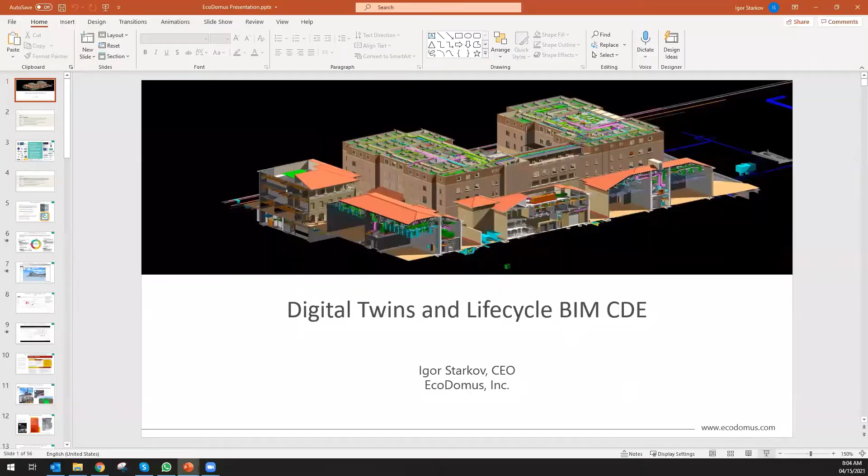All right, so first about EcoDomus. EcoDomus is a California company. I'm one of the two co-founders, and we have been around for about 11 years. We were the first company that started using BIM for something besides the clash detection that everybody used it for the first 10, 15 years.

So it happened, I was graduating from my previous company, Latista, which is now part of Oracle, which was the first company to do the tablet PC-based construction management. That was 2008, 2009. COBie was just introduced. COBie, for those who don't know, stands for Construction Operations Building Information Exchange. And I decided to build a software for COBie.

And then my co-founder, Mitch Borislavsky, who is based now in Warsaw, in Poland, he said, why don't we, Igor, start offering these solutions to the owners, the COBie for the owners. So we said, it's a great idea. And so we started doing the intelligent model for the first client. It was University of Southern California.

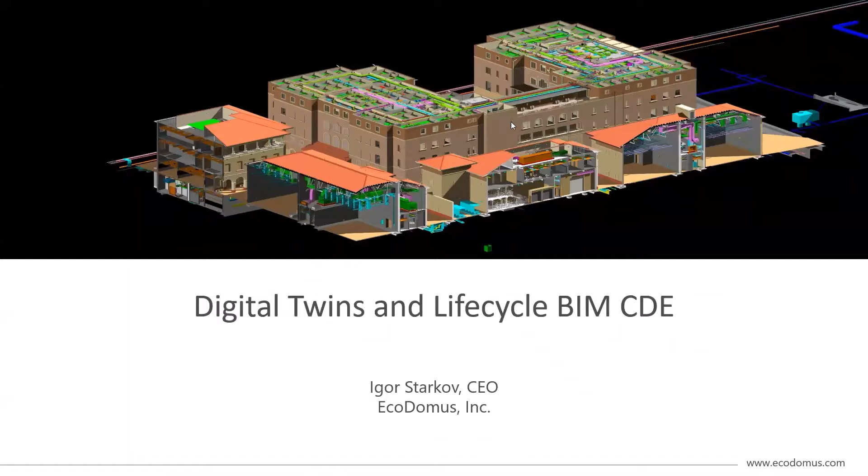So the building you see in front of you, it's a School of Cinematic Arts funded by Steven Spielberg and George Lucas, and they wanted the university to use 3D BIM. So the university asked for BIM from their contractors. That was 2006, 2008. They got the beautiful Navisworks model, but it was useless because nothing about this model was intelligent in terms of the data. And so we started helping them by collecting the information for this model in our application. And so that's how EcoDomus was born.

Since then, we've been working with the world's greatest facility owners, clients, and their builders, architects, engineers, facility management consultants, and IoT consultants. So, for example, EcoDomus is the BIM common data environment for the US government, for the GSA. GSA stands for General Services Administration. So about 9,000 buildings for the GSA are being stored in EcoDomus CDE. I'll show you today a few other nice examples like Sydney Opera House and maybe Google and some others.

So the idea was to build this software that would process the data associated with BIM elements and allow people to access the BIM models through the web interface and kind of democratize BIM a little bit. So that's what EcoDomus is.

So now let's move towards the definition of what digital twins are and why is it critical? There's a lot of conversations going on right now about digital twins. Some people just laser scan the facility and say, hey, we just built a digital twin of that facility. Our definition is slightly more complex.

First of all, from the technical point of view, digital twin is a combination of all available technologies related to a facility. So it's BIM plus sensors plus CMMS, CAFM plus ERP plus GIS plus DCIM plus whatever, right? Because if you miss out on at least one of the technologies, they may say, well, why are we not also a digital twin, right?

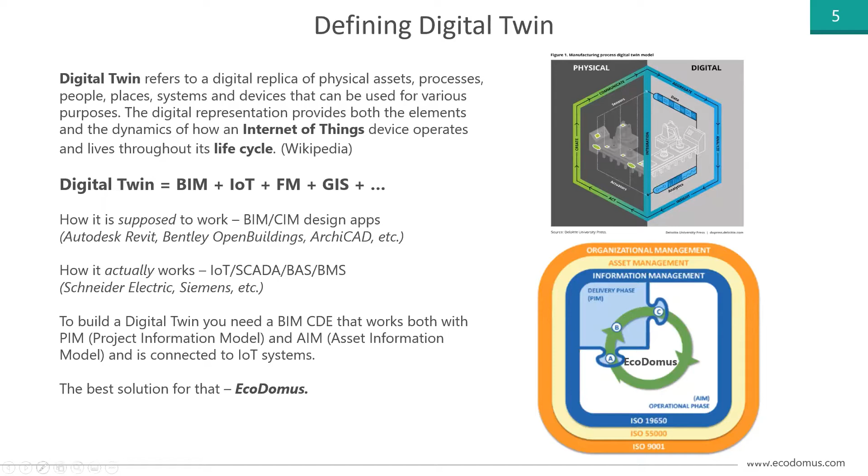Our solution, why I put it in the middle here, is a life cycle common data environment. You've definitely heard of many other CDEs like BIM 360 Docs, ProjectWise from Bentley, Aconex from Oracle, and British solutions. They primarily focus on PIM, on the project information model. We are supporting both PIM and AIM. And let's now dig deeper into what I mean by that, right?

So common data environment is during the design and construction stage. Some of the things BIM 360 Docs does better than we do, right? So for a small design firm, if you just need to store Revit files in the cloud and open them up and just publish the files back to the file storage, you can be okay with BIM 360 Docs. Some things it does even better than we do.

On the other hand, if you want to manage the metadata for the elements of the model, we do that better than BIM 360 Docs, because our capabilities with asset information management are more advanced. And we do it all in one platform, while in BIM 360, you need to have separate applications for Docs, separate for Field, separate for Ops, separate for Assemble, because Autodesk was buying them over the period of several years, right?

So it's not easy to take an application and merge it with another application, completely creating a single platform. It's impossible. But you can integrate them to some degree, but it's still going to be separate applications. EcoDomus is a single platform, so we have one single database where we store that information.

So during the design stage, our goal is really to check the model data for compliance. So we have a QC engine that helps us to establish the set of requirements for the metadata for the elements and make sure that this information is useful for the handover to construction. During the construction phase, we validate information that builders are entering in the field or back in the office and making sure that it's well prepared for the handover to operation and maintenance.

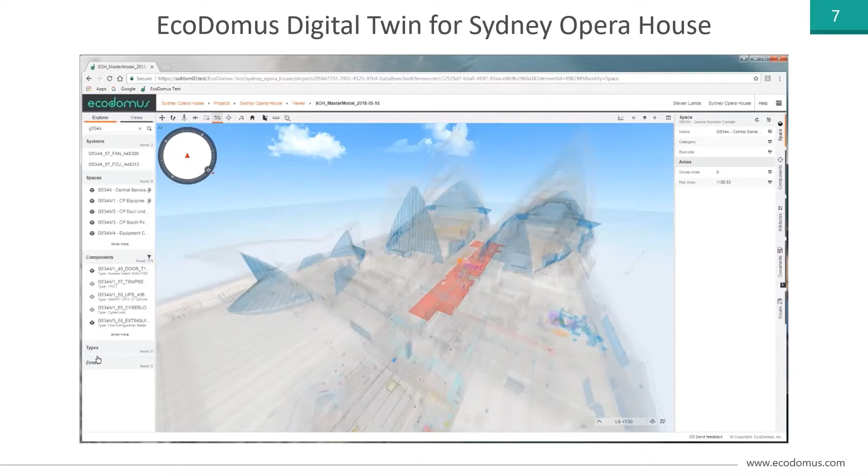The other thing is also the Autodesk API for Forge. It's limited. Autodesk doesn't open up some of the API calls because they're afraid of the competition. For example, there is no native Forge app for the iPad and Android. You can only use the browser version. And we use native apps from the App Store and Google Play when we deal with native mobile applications. Anyway, so we decided to build our own viewer.

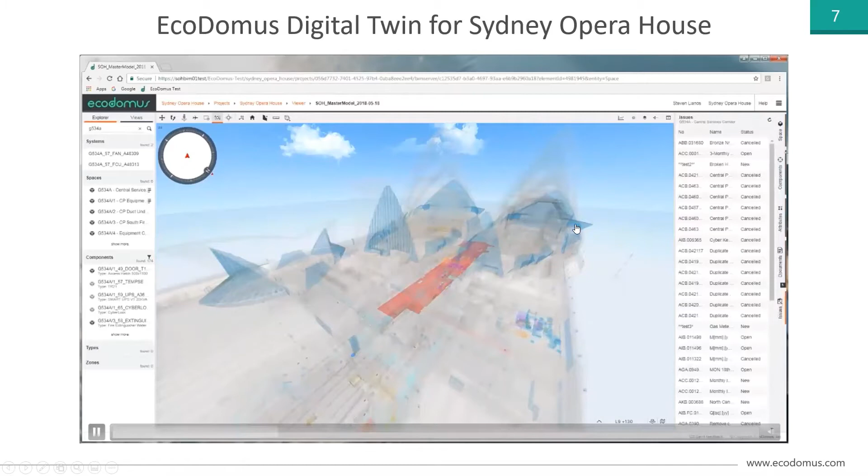So I found this location. I see it through the walls because it's an underground location. On the right side, I see all of my objects inside of that space, 1,200 of them. I see the attributes extracted from the model for this space. I see the documents associated with that location, that space. I see all of my construction and operational issues or work orders associated with that location.

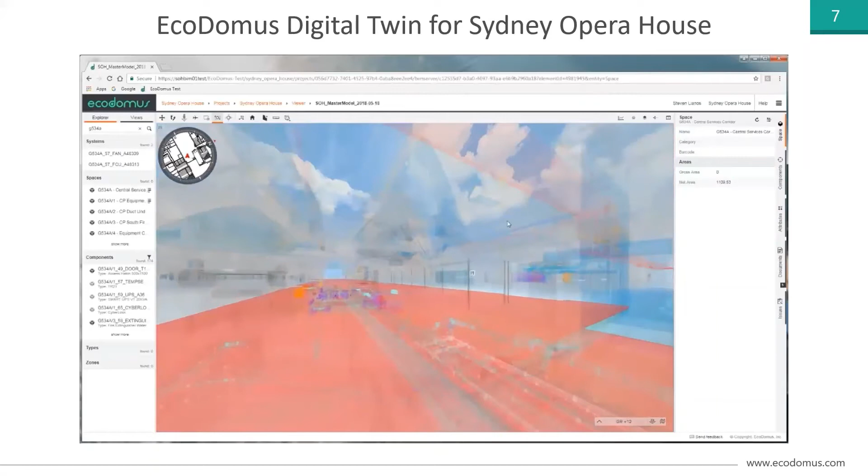I can see how many people are right now in that location, what's the air quality, what's the temperature within this location. So pretty much any question I want to know about this room, I have in my database. Now I remove the transparency because I want to see the objects as they are. And here's the lighting fixture that I'm interested in. Now I see the information about this component.

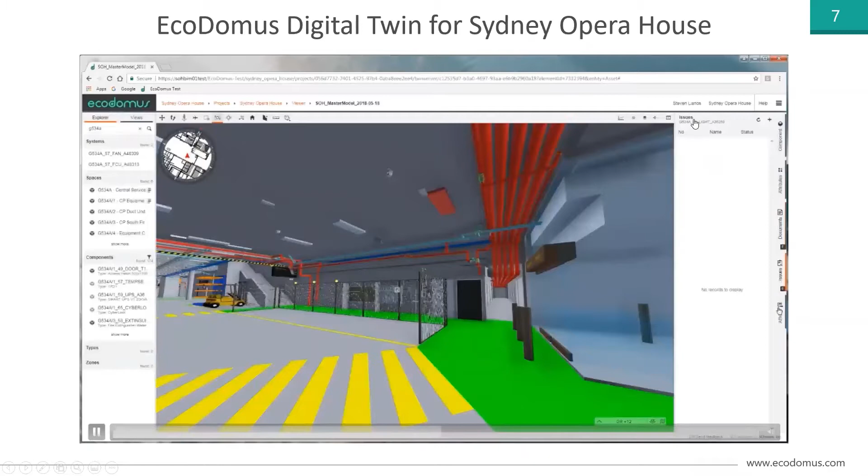And not only can I see it, like in many other viewers, I can edit those parameters. I cannot move the geometry of this lighting fixture, but I can edit its parameters. And I can open up the documents associated with this lighting fixture. I can see the original electrical schema from the 1960s. I see that there are no open issues, so I can create an open work order for this lighting fixture, specify that something is wrong with it or whatever.

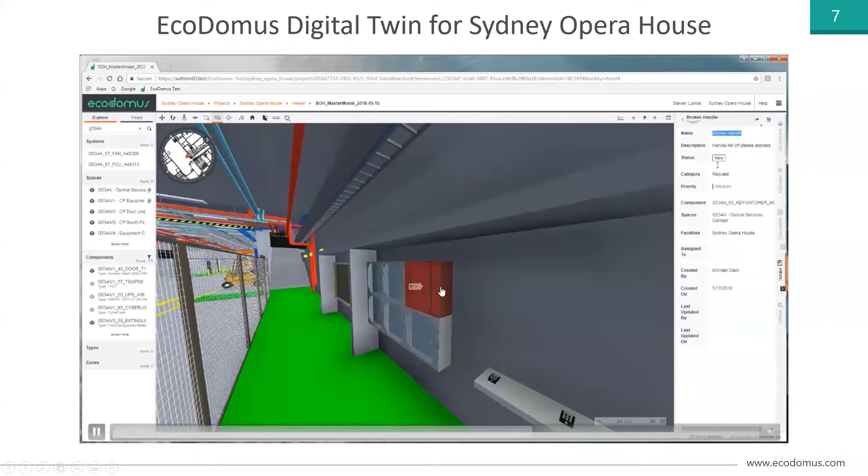While I was looking at this lighting fixture, I noticed that there's an open tag applied to one of those boxes. So I see, all right, so this is the box. What is happening here? I see it's the key holder box, and there's a broken handle for this box, so I can assign somebody to go and fix it if needed.

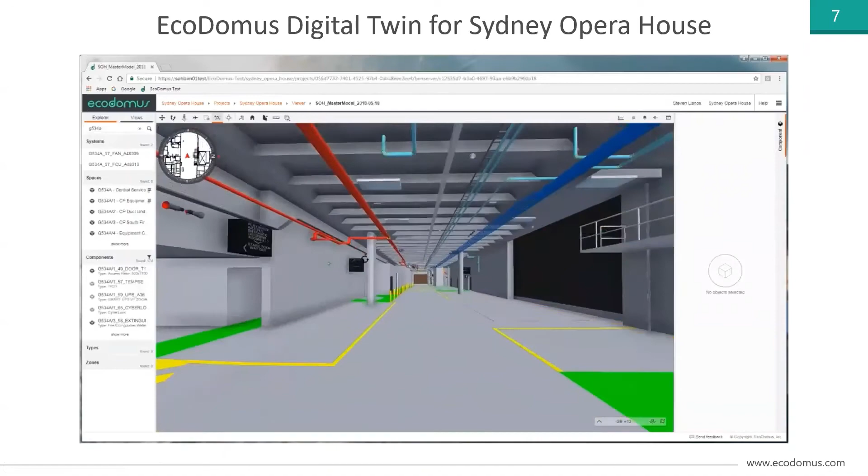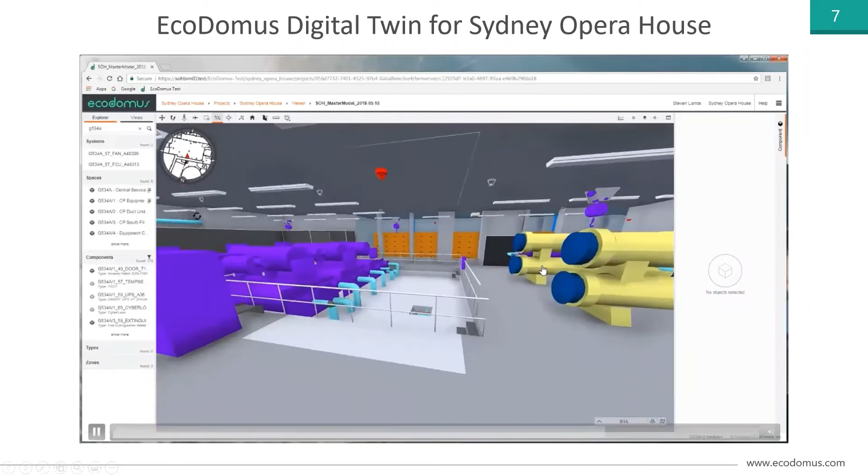As you understand, since I'm dealing in BIM, it may be an existing facility, or it may be a facility that hasn't even been built. You can simulate the work as if you actually already built this facility and do all of these trainings and planning while the building hasn't even been built yet, right? Because we operate in a virtual world here. So I can look at its chiller room, I can go back, and I can actually switch to 2D navigation if I want to, because 2D and 3D, we have them interconnected.

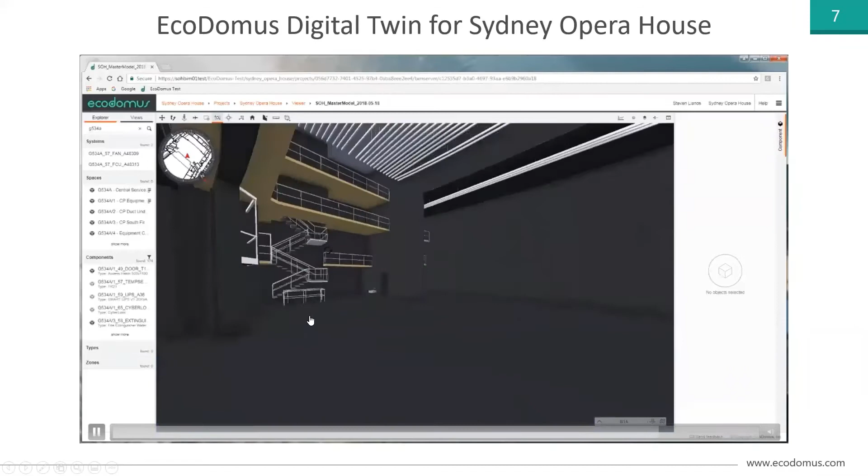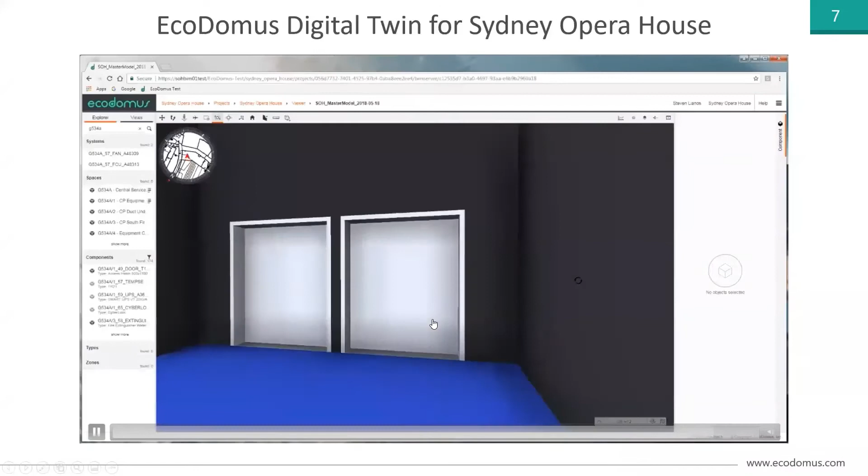So now I'm going into the central performance hall. I've noticed that my chairs layer is turned off because it's the federated model. So I can go back, you see all of these files, they are BIM files here. So I turned on my furniture level, and I can select an individual chair and say somebody spilled coffee on that chair. Right. So that's how kind of a basic navigation within the software works.

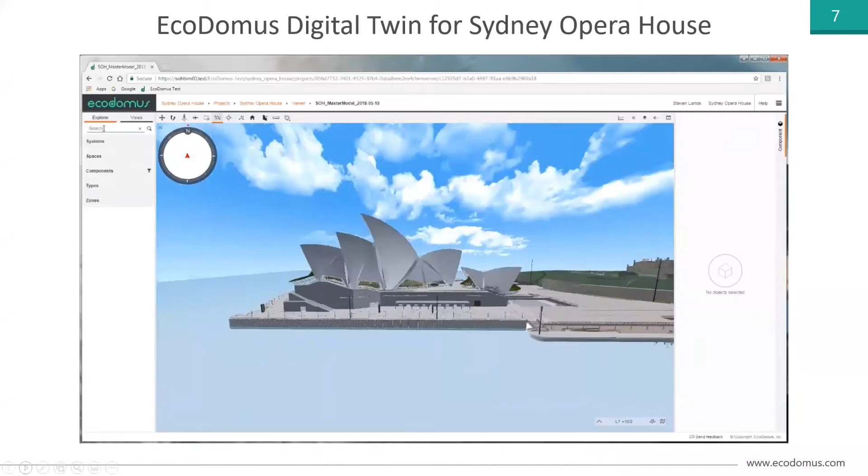All of these elements are objects. Every object has the database connection, and you can do something within it. Like I mentioned earlier, 2D is also an interface that we actively support, because a lot of tasks look better when they are navigated within 2D, like for example, electrical schemas, but we still make them interactive.

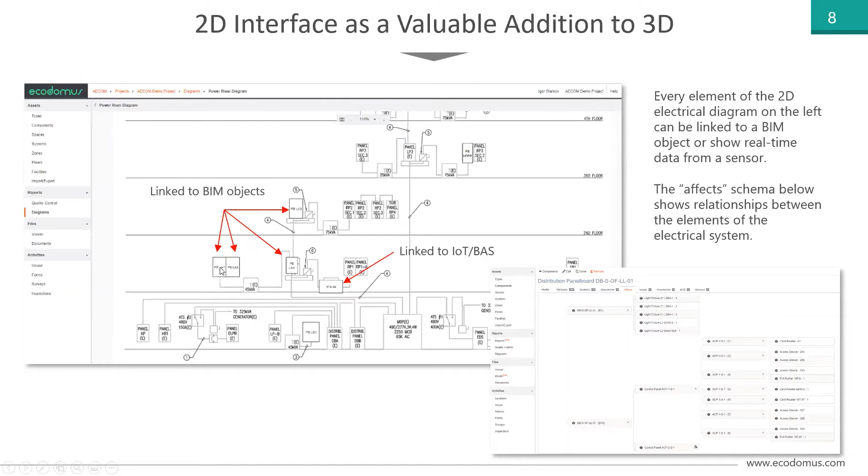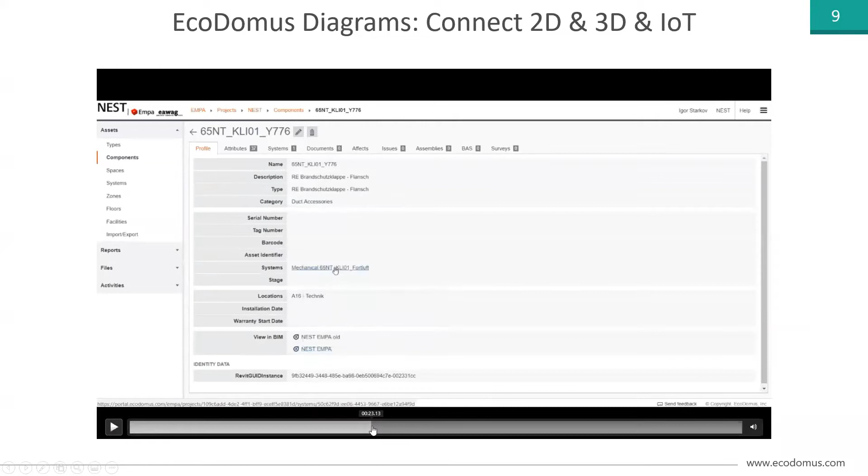So when you click on this rectangle with panel board LA1, it will open for you the profile page for that asset, and like in this example, when I navigate here, this is the building in Switzerland. So I can see my real-time data, but at the same time, I can see my properties for the assets. I can see the documents, BAS data, et cetera. And if I want to see that in 3D, it loads my 3D viewer and finds that asset within the 3D viewer. Showed me where it is.

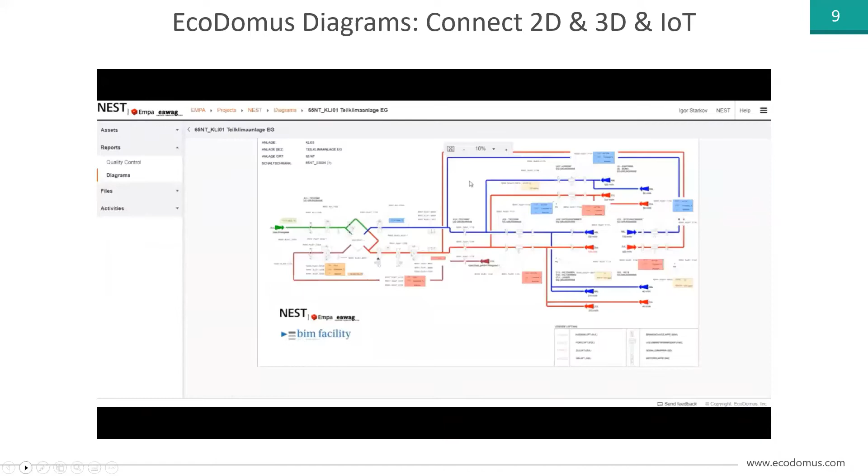Why do people do that, right? There is no such thing as a generic digital twin. All of them are used for a specific purpose. So for one client, a digital twin may include only architectural elements, because that's what they built it for. We had a client that wanted to train their first responders, the firefighters, police, and for them, piping and ducting was not needed. So it was much easier just to create the basic architectural and just navigate within there.

For other clients, like we're doing a big project for Harvard University, they said, look, we don't have the budget for electrical right now, and we're not that interested, but what we're interested in is water. If there's a water leak, plumbing leak, I want to click on the piece of a pipe, and you need to show me where the closest shut-off valve is.

So what we did is we split the Revit model into the subsystems in such a way that clicking on the pipe was bringing you to the closest shut-off valve. By the way, by default, Revit doesn't provide that functionality. It was something we did in addition to what Revit can provide you with by default. So somebody says, well, we have these complex plants, and utility shutdown each time takes quite a lot of time. So we,

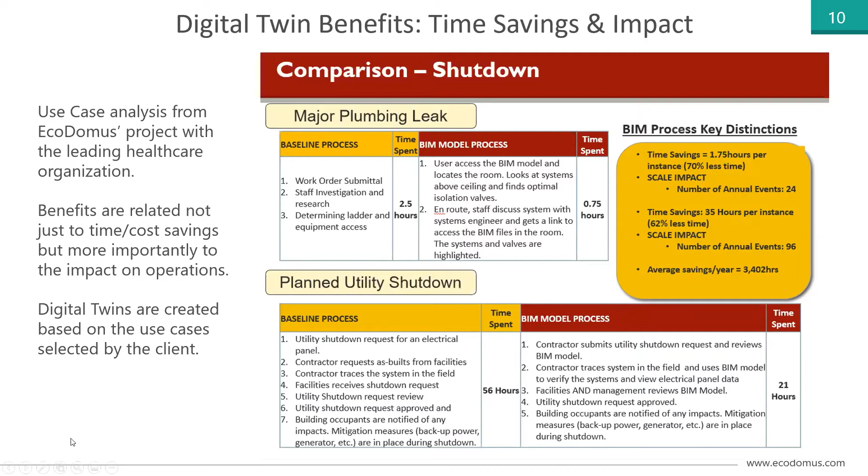So for a plant, let's say, it's understanding how the objects have the relationship one to another. That's going to be useful for that specific owner, right? So when the owner defines what they need to build and how they want to use it, that's how you build your twin. And it's not just buildings. We're all used to BIM being for, and somebody shows you, an office building.

Right now, I would say the most actively developing industries for us are infrastructure, industrial, because that's where the money is, right? So wastewater treatment plants, factories. I cannot say oil and gas is active, but it's starting to warm up. So it doesn't really matter what kind of structure, as long as you can touch it, that means you can create a virtual representation for it.

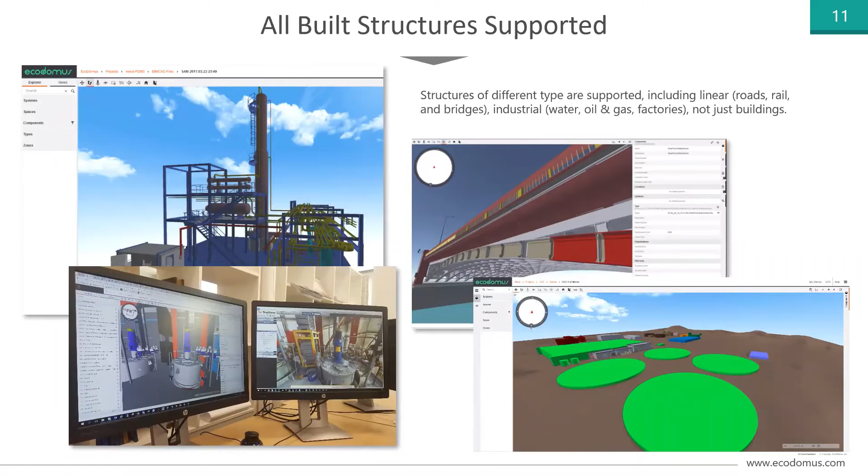There are plenty of materials, fortunately, created over the past 10, 12 years. There's even a book written called BIM for Facility Managers about 5 years ago. I was helping Paul Teicholz with some materials for this book. There are lots of reports. PwC published a report about the benefits of BIM. So if you're looking for more information to prove the value of BIM and digital twin to your management because they cannot approve it for some reason, let us know. We can help you with the materials.

How these models are being created. It's important to understand that not all BIMs are created equal, because the design BIM and construction BIM are two different things. And the owner-focused BIM that is needed for the owner's digital twin is the third thing. You know, people don't really know about that. Some of course know and share with the clients. Clients call me and say, hey, I just got BIM, I finished the construction project, now I want to use it.

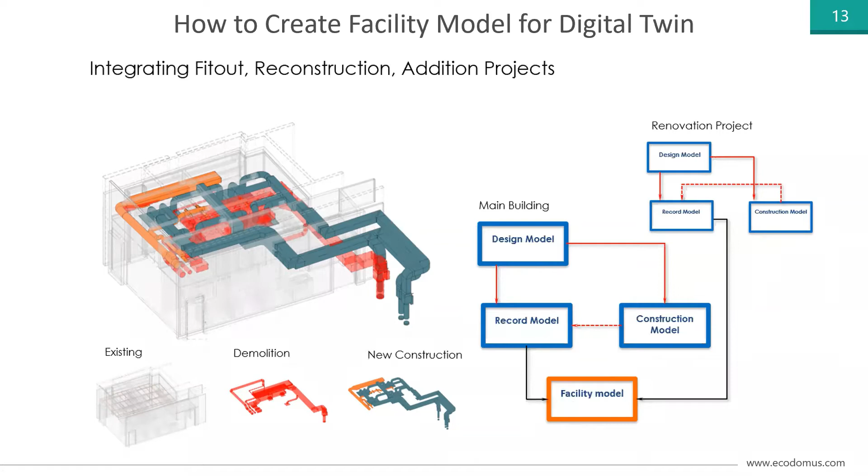And I'm like, hey, I'm sorry, but you most probably will have to spend some money to upgrade that model to make it useful, because your modelers probably didn't model systems, didn't place room objects correctly, probably didn't name those objects correctly, et cetera. So it needs to be clear that these record models or facility models that are created and maintained, this is some skill that you need to have. You can learn it, of course, there's nothing difficult about it, it's not rocket science, but you need to be using the BIM authoring tools as BIM authoring tools and not as just 3D drafting applications, like 90% of people use it. All right.

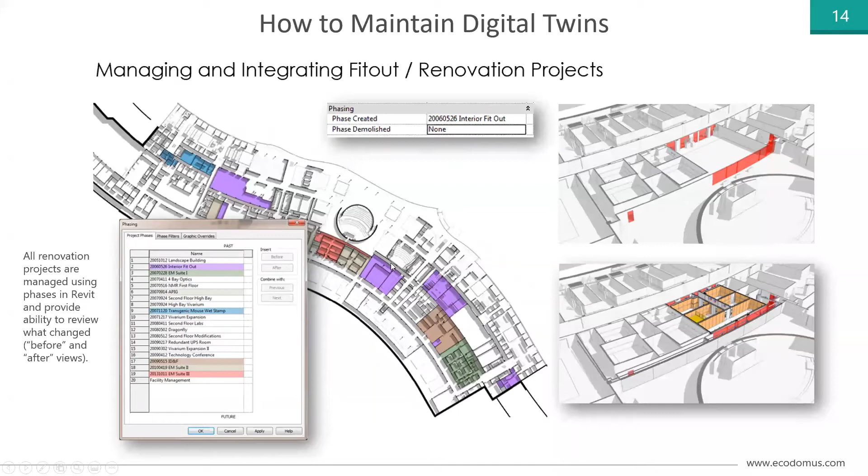So it's also not difficult to maintain those digital twins, but I'll admit that very few of even our clients are maintaining them. So everybody's happy just to build it, and then like, phew, we built it, but all of the renovations then continue in the old way. We have a few clients that are advanced, that are maintaining the versions of all of their renovation projects within the same approach of phasing, and they are able to see what was there before and what was there after for all of their renovation projects.

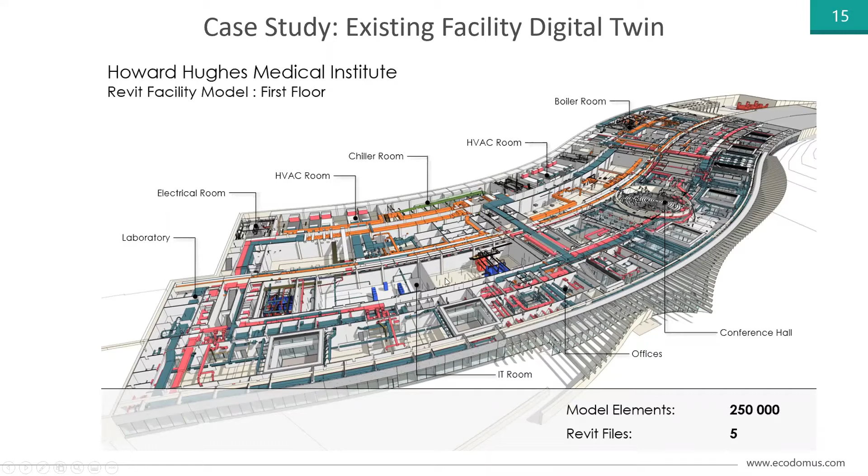So they can build complex facilities like Howard Hughes Medical, for example, one of our first clients as well. These guys do a lot of renovation all the time because it's a research lab, and all of their renovations are properly maintained. Pretty unique client, by the way. Very detailed, everything known, everything is virtual, kind of a poster boy.

All right, so standards. Let's talk a bit about standards for creating those. First of all, everybody's lacking information in their standards, if they even use one. The supply chain is not using information modeling, like I mentioned earlier. Supply chain usually does just drafting. There is no responsibility, meaning that there is no information manager. Usually there is the BIM guy who is tasked to collect some data, and he sometimes does it, sometimes not. People try to use Excel or something not developed for that functionality because they already have it, or because management gave it to them.

Owners typically don't provide any requirements. They just say, give me a good model, which is nothing really. And everybody tries to do it at the last minute. The schedule is always behind. They all say at the beginning of the project, we have lots of time, don't worry, it's a one or maybe two year long project. We will take care of the information closer to the middle of the project. Then they say, well, probably close to the end of the project. Then the project is over. Well, we have another year before substantial.

Anyway, so everybody's behind. So what is important is when you start, even before you start modeling, you need to know answers to a lot of questions. What kind of data will we be collecting? What is the asset information requirement that we need to build that model? How are we going to be doing it? Who is going to be doing it? When? Where will we manage that information? So all of this needs to be based on the client's organizational requirements.

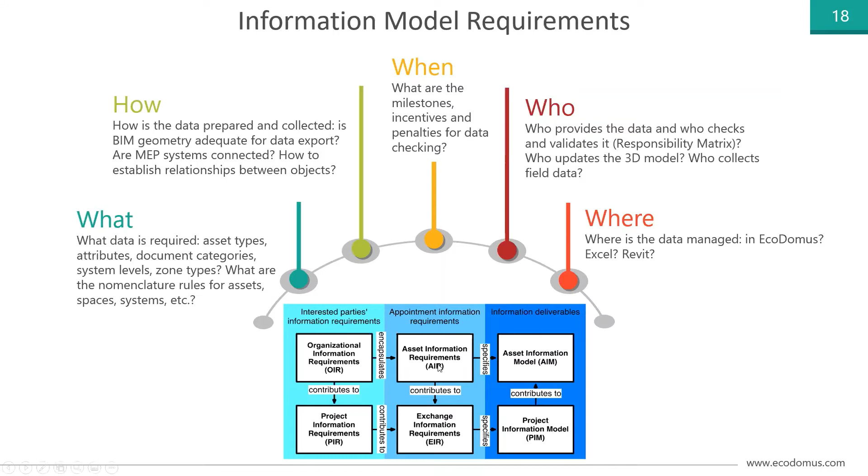Right? So like I said, let's say they're saying, we are a Class A office building. For us, the number one need is tenants' comfort. For another client, it's not that at all. For them, it's risk management, because we are a public facility, let's say a train station or an airport. For us, number one is risk management. For the third one, hey, it's cost. We need to reduce the cost. Those three tasks are completely different. So the asset information requirements may be different, so the model can be different, right?

And like I mentioned earlier, typically the models that were being created focus on 2D PDF deliverables, no systems connected, geometry problems. So all of these things need to be sorted out before you start modeling, so you don't redo it again. People don't want to pay twice for the same thing.

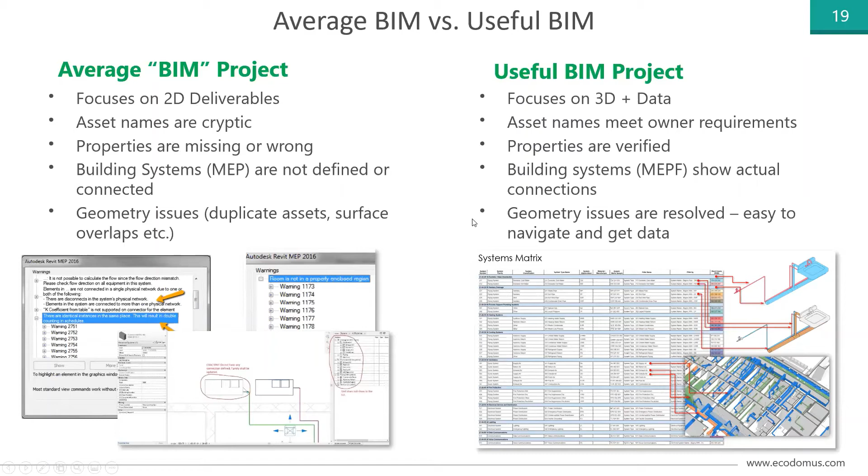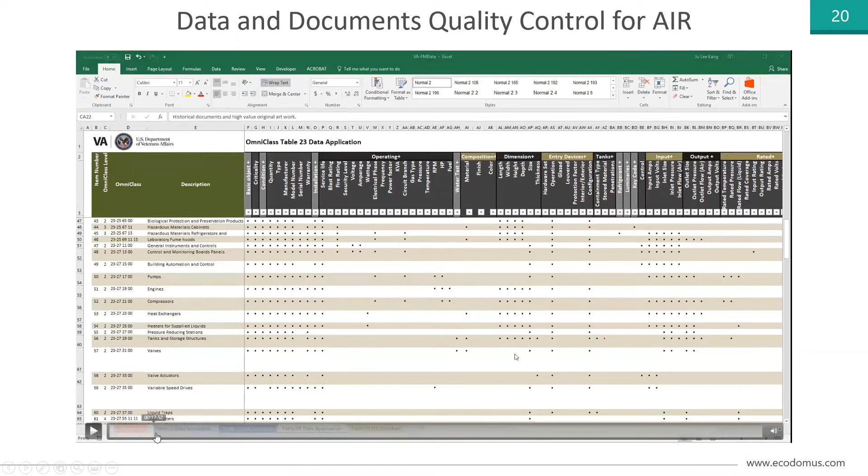So what we can do is we can take those requirements and populate them within EcoDomus QC engine, where we define all of those fields. We specify what would be the interface when we collect these fields. As you can see here, when I open up this valve, I can see exactly the fields that the client wants, right? And at different stages within the project, you can run a QC engine and it will tell you that these are the fields that are missing. These are the documents that were supposed to be uploaded, but they were not uploaded, right?

So this is something like, some of you who work with Solibri rule sets, right? So you're familiar with this process. What we decided to do is go beyond just dealing with IFC files, because some information is not stored in IFC. Like for example, documents, you cannot squeeze the document into an IFC. So here I see that for the ball valve 1 inch, I'm missing image and specification document, and I'm missing those 3 fields.

The other thing with IFC that is difficult to do: here if I'm missing this field, I'll just edit it right here. If I'm missing this document, I will upload it right here. So I can fix my issues within the same environment where I found this. I don't have to send the email back to the modeler, say, hey, you need to enter these dates into your file so we could republish the IFC, and then send me that IFC again so I can retest it again in Solibri. So we avoid that step.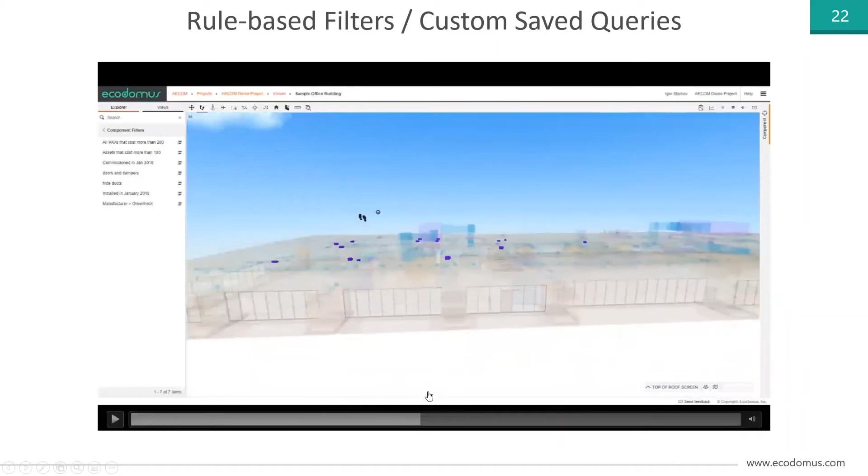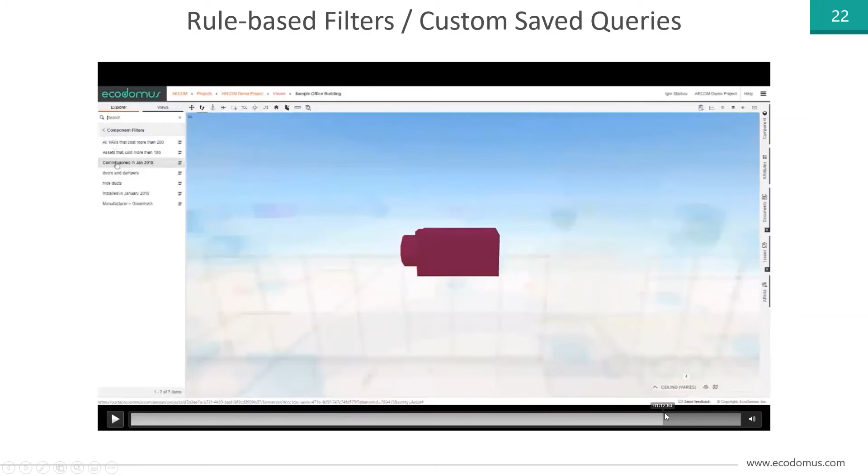And I can run the same query within my viewer. So I can see those 15 VAV boxes. I can interrogate each one of them. Right, so this is my VAV box. That's another VAV box. Or I can run that commissioning query that shows me commissioned objects. Right, so you can see what has been installed, what has been delivered to site, etc.

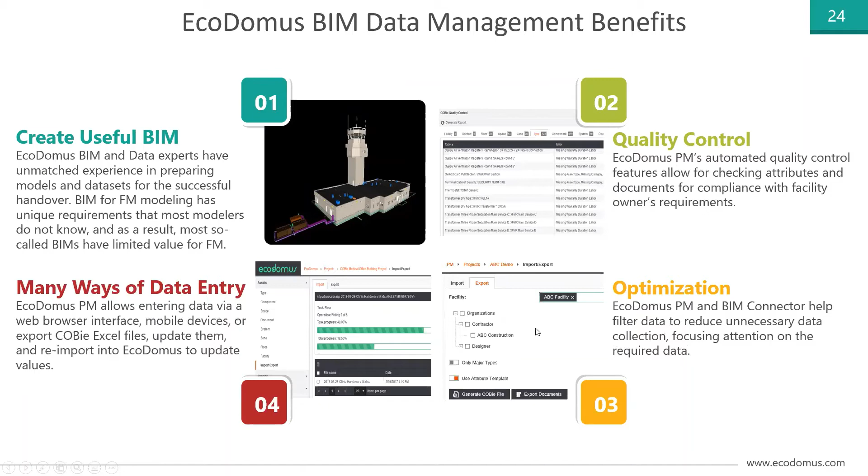So they need either a mobile interface or the browser-based interface, so they can enter this data instead of sending emails with this information to the BIM guy who will start typing it inside of the authoring application. And you can also simplify their data entry by optimizing their interface, showing them only the information they need to see. 2D workflows, right? So a lot of people still use traditional PDFs, DWG files, DGN files. So you need to have the ability to work with all of these traditional documents. So we have the document management module within the application.

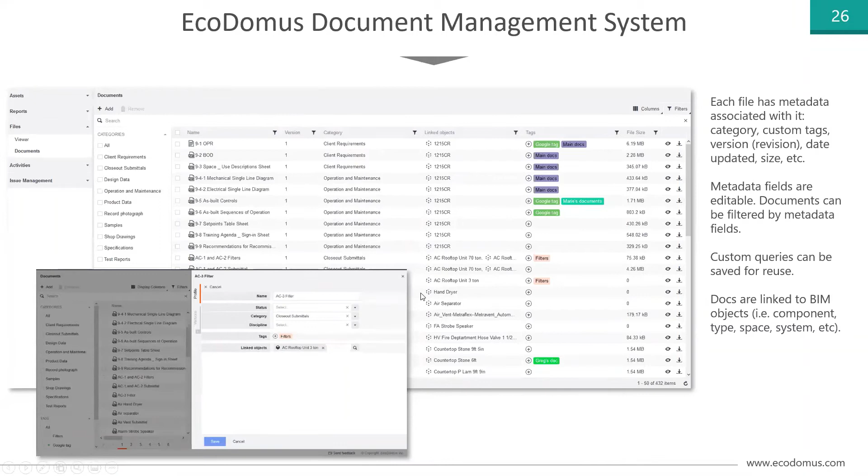The major difference is that we can link BIM elements to any of the files and not just assign a document to an individual BIM component, like some 3D viewers allow you to do. In our case, you can assign it to either a type or a system or a space or a zone. So you can assign it to different types of entities within the environment. Plus, you can do traditional EDMS functionalities.

EDMS stands for Electronic Document Management System. You can do your redlining, your comments. You can create issues associated with your PDFs. You can do check-in, check-out, or locking the documents from changes. You can customize metadata for those fields.

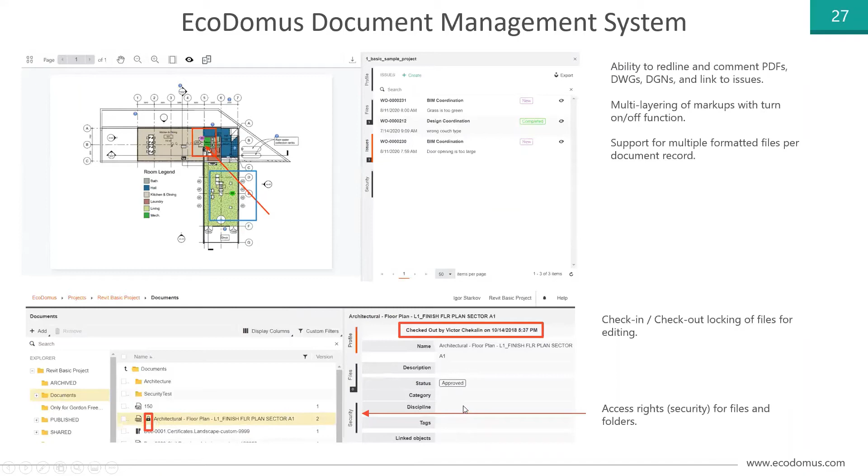You can define any fields for those documents. You can define your own workflows, what happens, changes the statuses. Like, ISO 19650 says that documents should go through the various approvals, right? So you can build these kinds of customized workflows. You can do the auto naming, etc. Right? So whatever you typically do with the documentation, you can do it here.

But it's more than just document management, right? We even have the PDF comparison, where you can compare the different versions of the same file and see within the PDF what has changed in this version, and you can even scroll and it will show you what specific section of the drawing has changed.

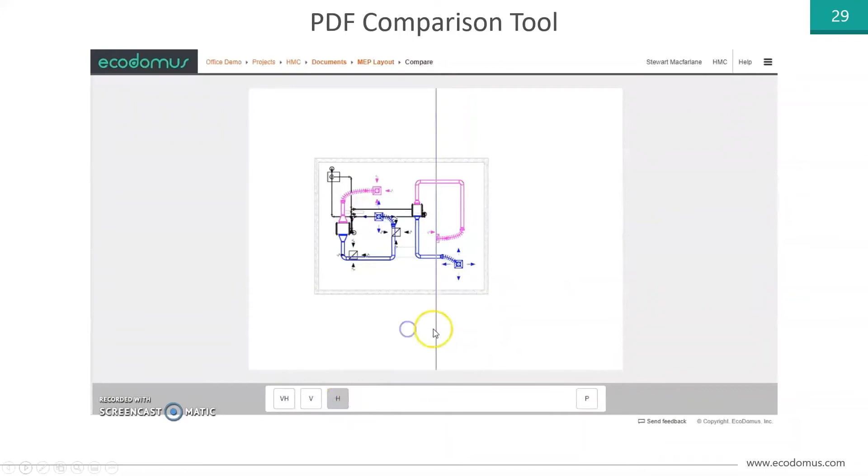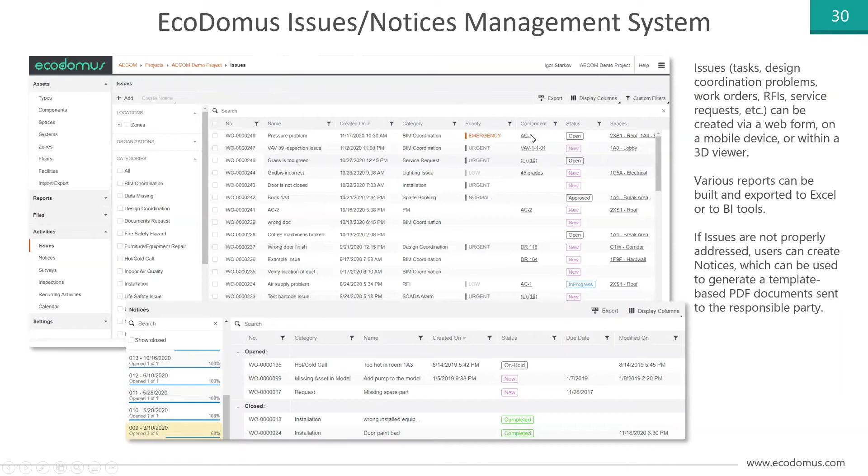All right, but that's not what I'm usually interested in. I'm more interested in BIM workflows. There's also a module for tracking issues. When you do the BIM design and coordination, or you do construction installation, or you perform operation and maintenance fixes, you deal with tasks, right? You deal with issues. So we have the ability to create issues in a traditional way, using, let's say, a browser or an iPad. You can just populate the basic information, what this task is about, but you can also attach the BIM objects to those issues.

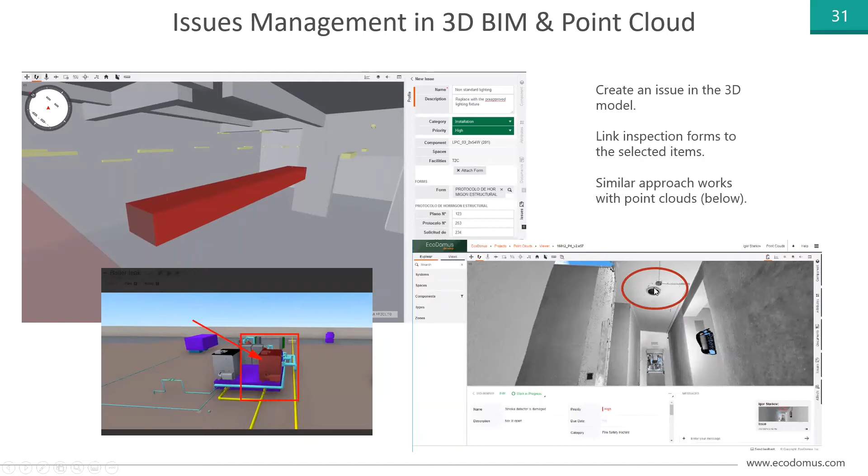And you can attach them also within the viewer. You can also apply redlining within the viewer. You can even do that within the point cloud. So we support point clouds within our interface. You can upload your point clouds and even do markups within them and create issues. Like in this example, let's say I've noticed that this fan is too close to this pipe. So I create an issue. This fan is automatically associated with the issue.

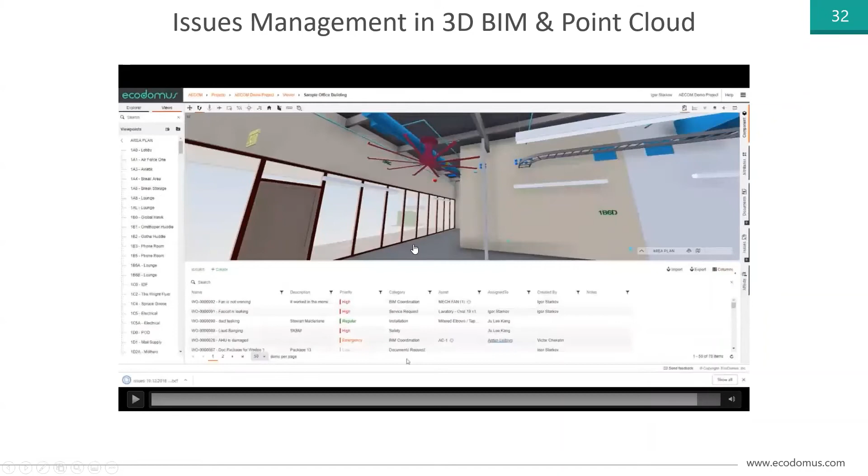I do the markup, the markup is attached to the issue, and then I send them via BCF. BCF stands for BIM Collaboration Format. It's the open standard for issue exchange. And that's how the individual issue looks. We see the issue description, and on the right side, we see the mini chat that shows the status changes within the issue, the comments, and the markups associated with that issue.

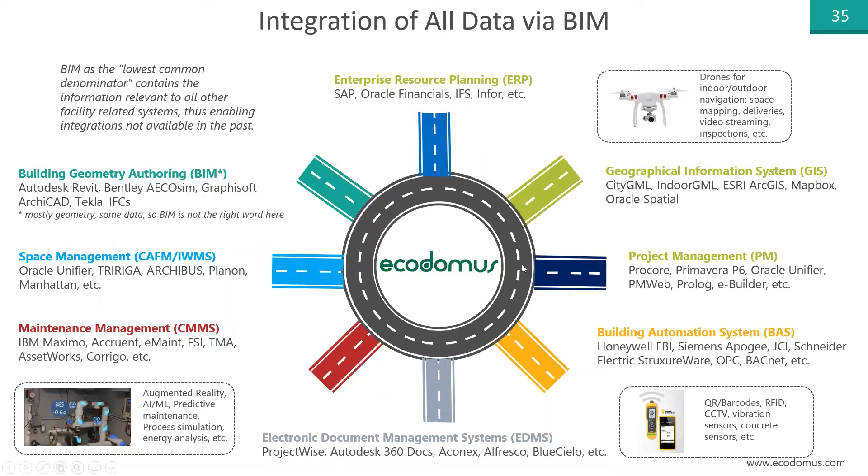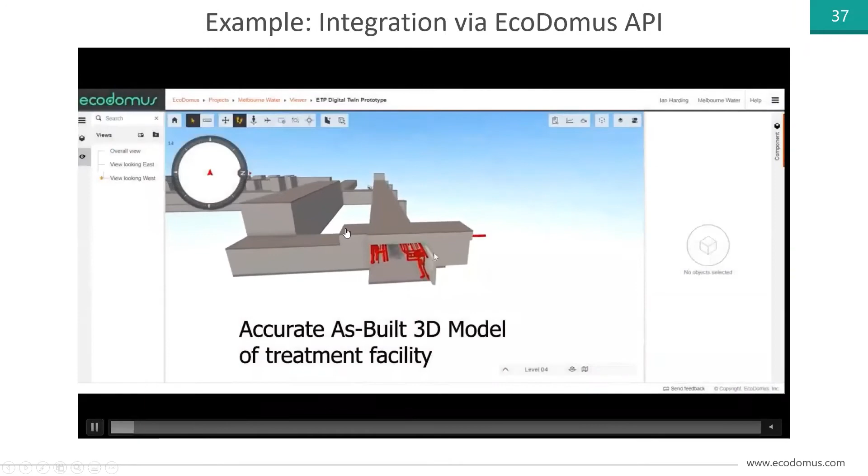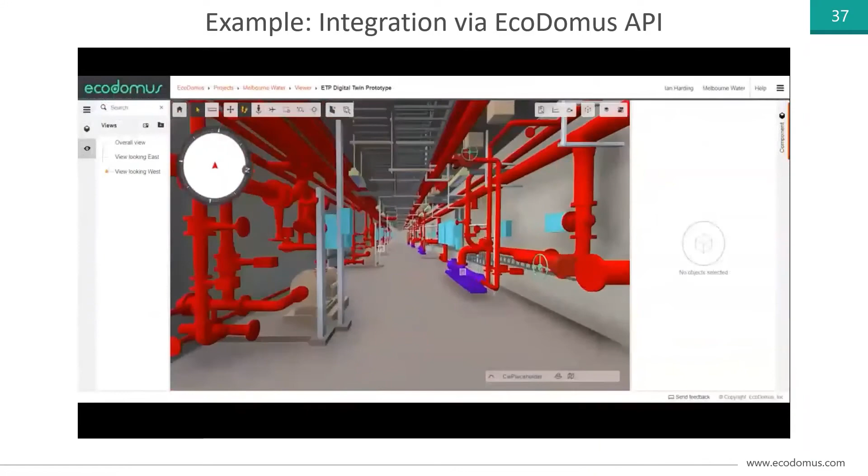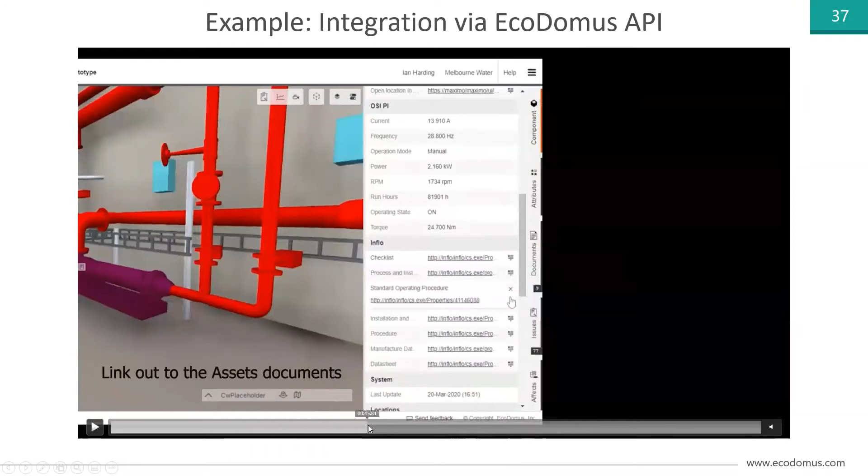Here's another project from Melbourne Water. It's what these guys did themselves using our API. Like many applications, we have our own API. Let's say Maximo has its API; we sometimes use that. But if you want to use our API, you can do what these guys did at Melbourne Water. They integrated EcoDomus with Maximo themselves, with OSI PI, which is the SCADA interface, and with the Inflo document management system. So they did it all themselves using our API. It shows you that not only we can do it, others can do it as well.

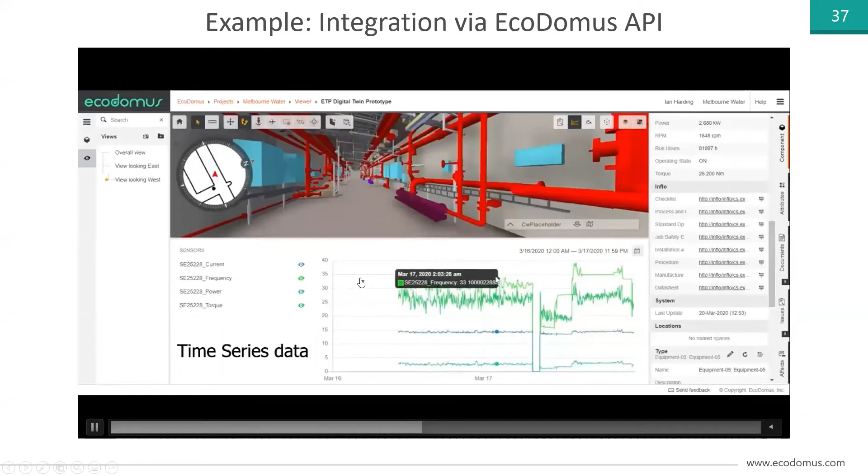So in this case, you see they selected a couple of dates, from March 16th to 17th, for this pump, to show the values. This is how the current, frequency and power were changing for these two data points. And on the right side, you see the linked documents. You can see the work orders that have been pulled in from Maximo here. So all of that can be a part of your decision-making process.

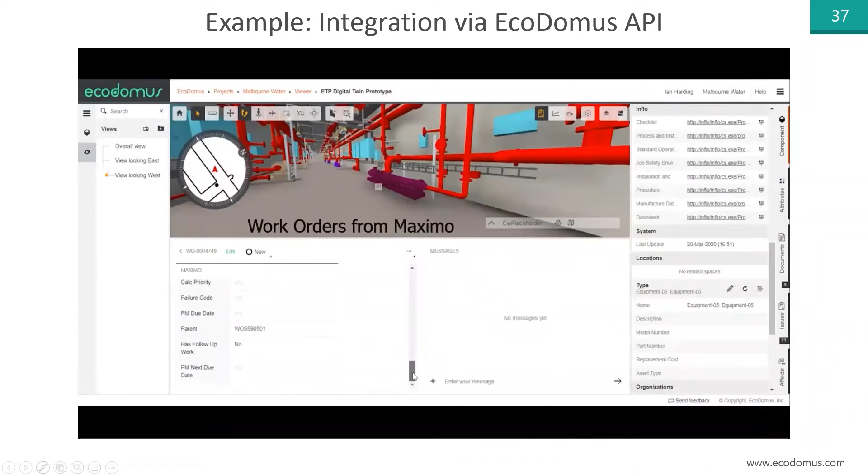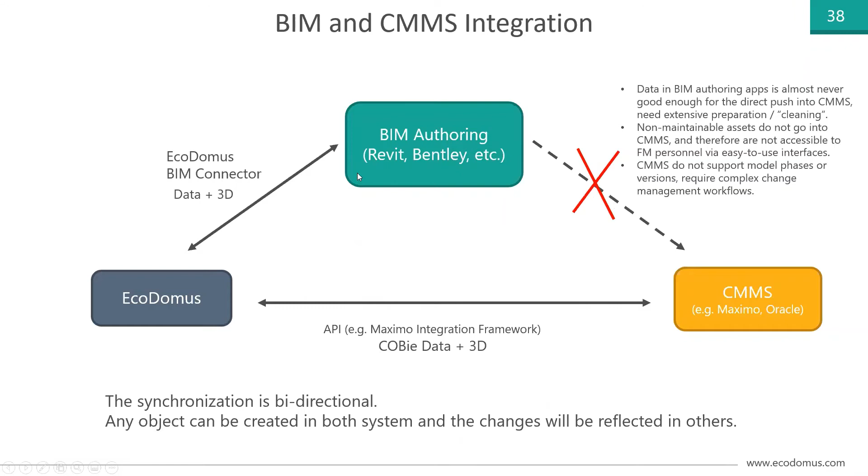Like I mentioned, we often do the APIs ourselves. You can upload the files. Let's say you can publish from one of the authoring files into Excel, and you can import that Excel into almost any other application. Usually this is a one-time approach. It doesn't really provide you much value, because all systems usually change. So the only way to establish bidirectionality is to use web services via API. You map the fields, and those fields, if they change, trigger an event.

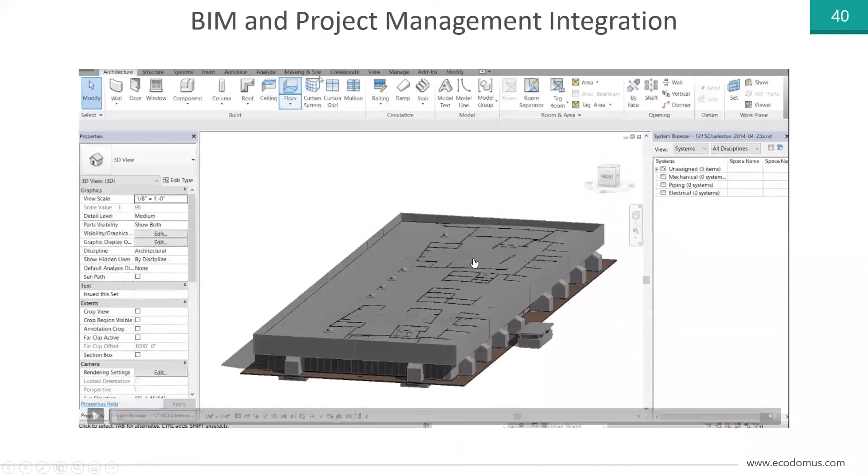How we publish the models: let's say here's your authoring environment. In this case, it's Revit. We do similar for Bentley OpenBuildings, OpenRoads, and for other technology using IFC.

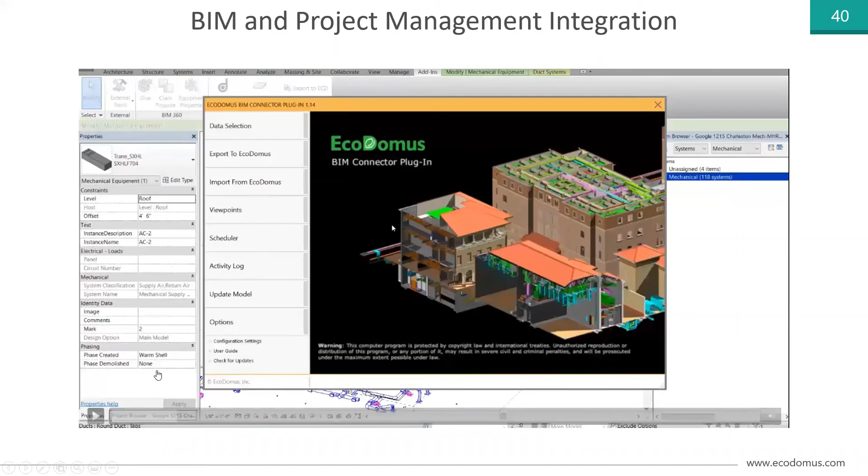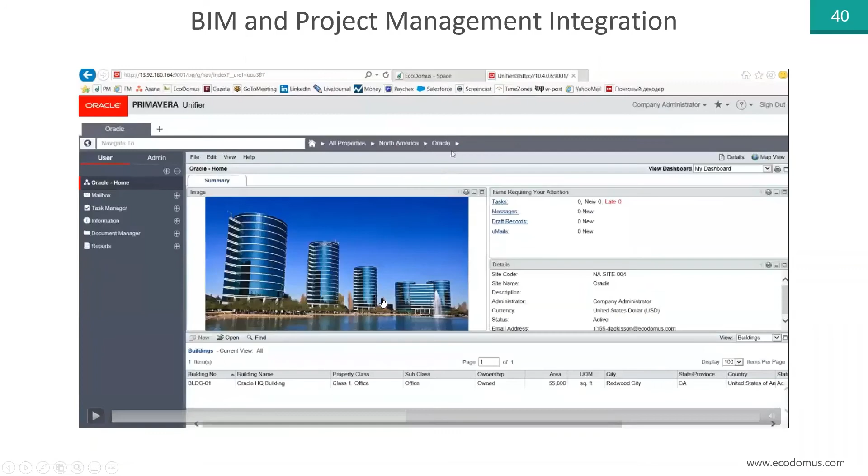So you select the data that you want to extract, and you push the data from the native application into EcoDomus or from IFC into EcoDomus. You publish the geometry, and that geometry becomes the visual part of what I was just showing you earlier. And from here on, you can push this data to other applications. Let's say in this case, it's Primavera Unifier, and we build the project management integrations if needed, et cetera.

Right, so I'll move on faster to BIM GIS integration. We also used Esri ArcGIS as one of the front ends within our sources. So in this example, we work with the City Rail Link in Auckland, and in that project, it's the largest infrastructure project in New Zealand. So there's several new metro stations and tunnels, and so you can jump from the GIS map for each of these sections into the EcoDomus viewer, where we have a merged environment.

As you can see here, it has the BIM embedded within the point cloud that was created using the drone scanning. So they can see how the model fits into the current real life point environment. Underground utilities are there as well. So this is a combined federated model that consists of Autodesk Civil 3D files, 12D, which is another package, plus some of it is in Revit, but most of it is IFC files that we got from 12D. So that's one of the ways to deal with GIS.

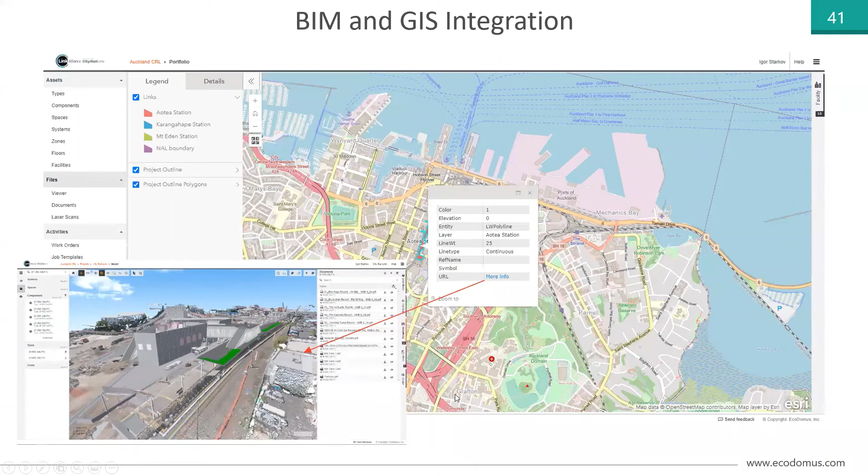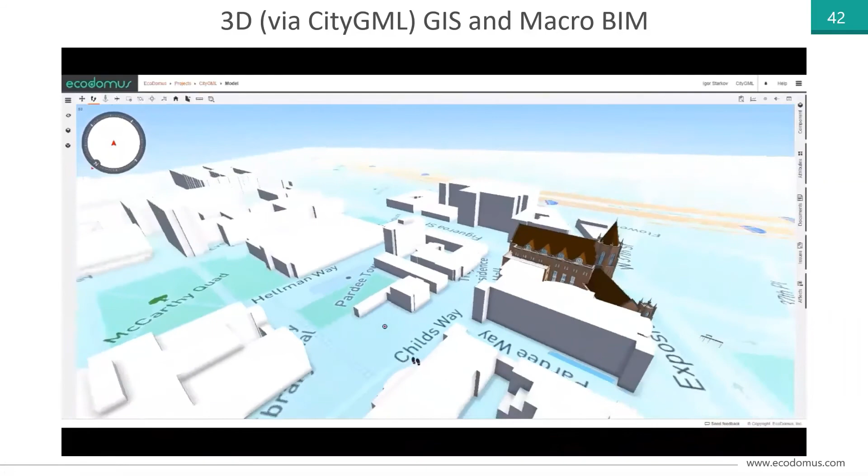The other way is using CityGML, which is an open standard that is promoted by OGC, the Open Geospatial Consortium. So CityGML is something like IFC, but for the GIS data. So most of these buildings, as you can see, are just shapes that came through the CityGML. This building was done through the BIM. And so in this case, I was selecting a lighting fixture, asking to show me which panel board it's managed by, and I can see where that panel board is connected.

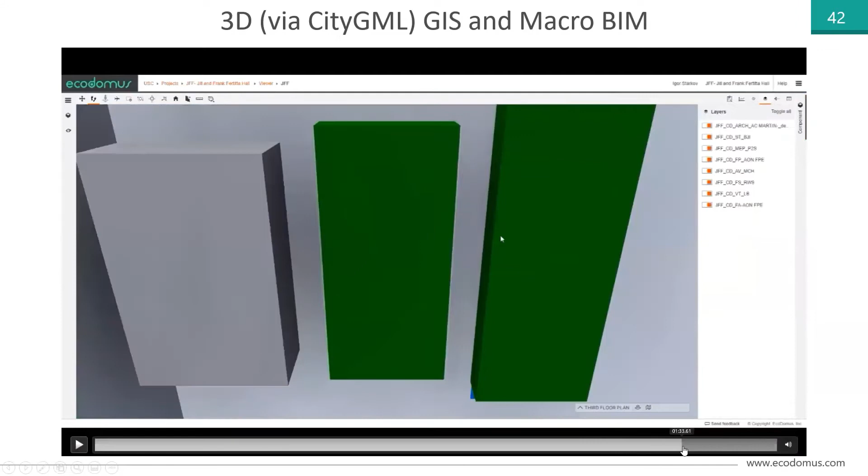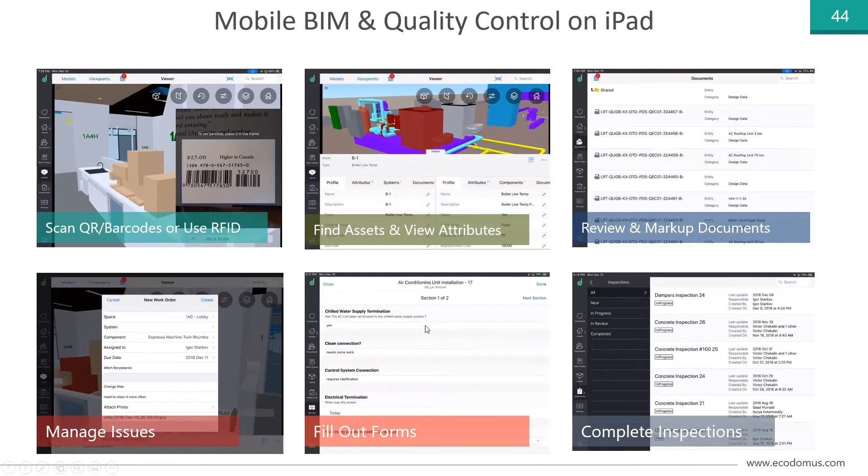And now let's move towards the mobile. Like I mentioned earlier, we have native apps for iPad and Android. And so you can use it to scan using the embedded camera. You can scan the QR code or barcode to find an object. You can edit its properties, review the documents that are linked to that asset, and populate electronic forms. We now also support filling out PDF forms. And primarily it's being used to create an issue in the field, attach a photo, and then review those issues, assign them and complete them.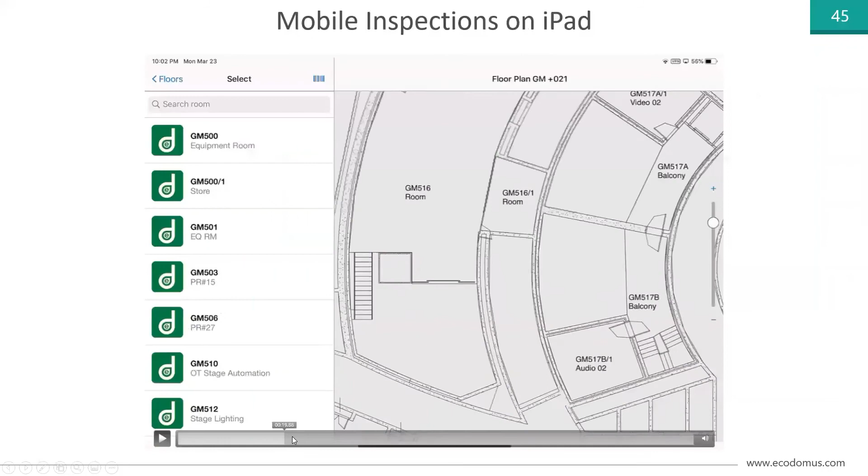Here also we use the inspections for COVID cleaning. So this was the opera house, selecting some room, then selecting how the assessment has been performed, how the cleaning was performed. If there's some problem, they are creating a notification. They click on the floor plan to specify where those found issues are. And the photo is taken for the problem, and they can start tracking it.

On the integrations with the sensors, again, a lot of people, when they talk about digital twin, only refer to sensors, right? They don't even talk about the baseline asset register. We consider that is not a very wise approach, because a sensor can show you steady information that's not jumping up or down. You think everything is cool, but in reality, your asset is working at full capacity. So it's going to fail much faster. There's a lot of different types of sensors as well: surveillance, videos, automatic blind control, etc.

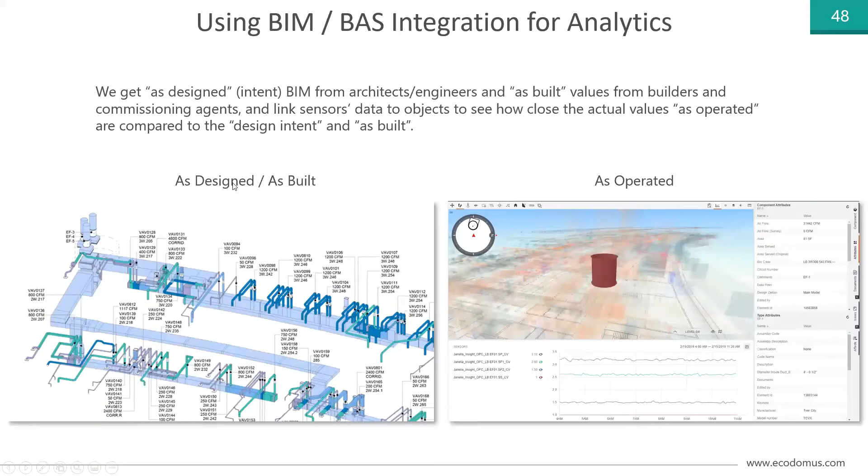We believe that in order to analyze how sensors behave, you need to know how they are supposed to behave. Right. So the simulation based on the actual engineering data needs to provide you the framework within which you are actually applying those sensors to see whether these values are in line with what you expect them to be. In this case, you can have what I was earlier defining as supposed to and as actually happening.

These are some examples. This is the data center, the largest in Eastern Europe, by the way. And here they are tracking the performance; you see the blue panels on top of the BIM objects. They are receiving real-time data, and based on this real-time data, they animate what's happening with individual pumps here.

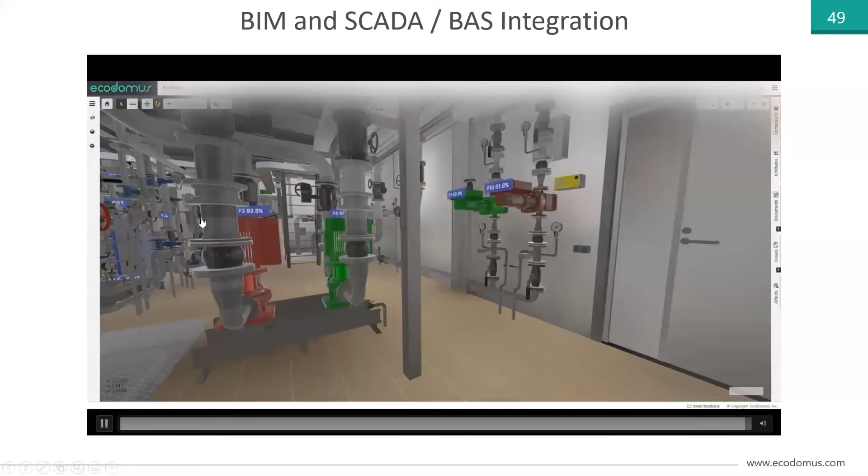So you can add those objects or these panels with real-time data within the BIM that we generate from the source information. In this example, we use different types of sensors. Here, the presence sensors, we used one from PointGrab, which tells you how many people are in the specific area. And we colored the floor plans in different colors depending on the number of people.

And at the same time, video cameras were showing exactly the same section. So you could see what's happening within that section. Video was received via the ONVIF standard. It's the open standard for video integrations.

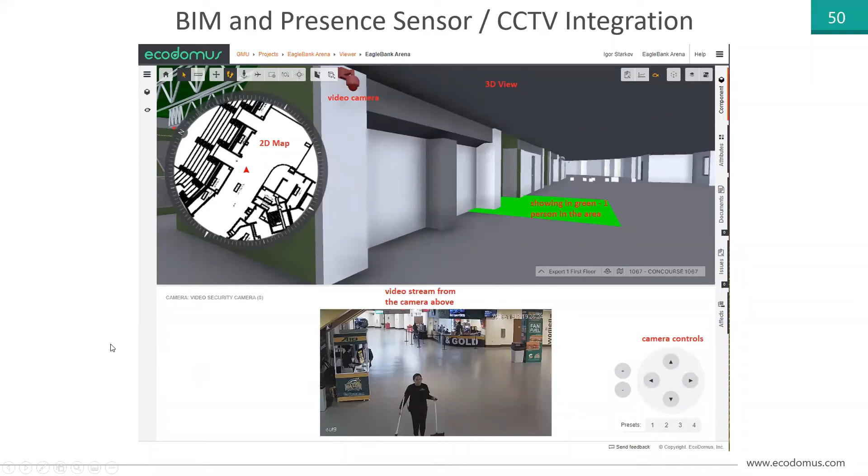There are other types of sensors that we are playing with. I would say it's mostly right now proof of concepts. I don't see many real, big owners that are actively deploying them for all of their facilities. It's usually kind of a pilot here, proof of concept there.

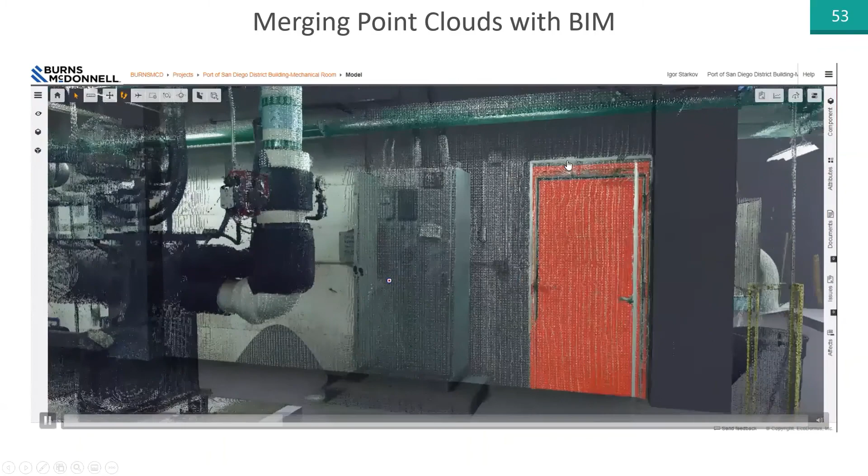On the laser scanning, I'm sure most of you know about LiDAR, right? And laser scanning, we use them all the time when new models are built to validate the accuracy of the models. But sometimes we also use them to create a mixed environment where some elements are modeled, like core and shell elements, where you can see them as parametric objects,

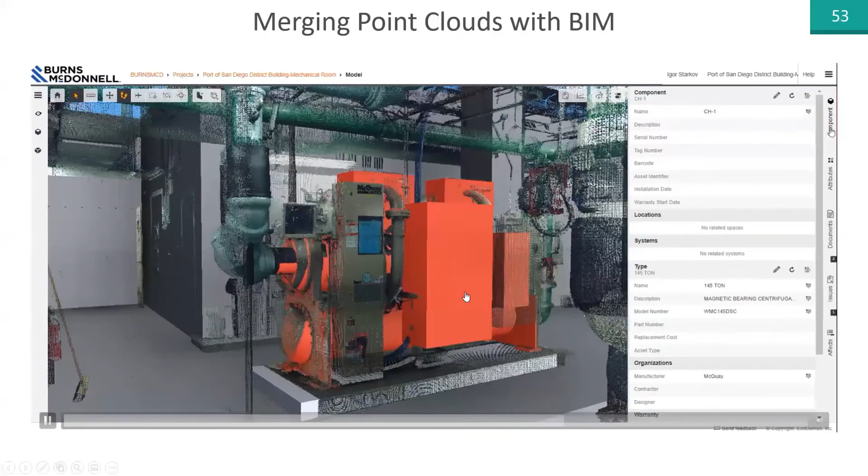but some objects are just created as the point cloud reference, so you can understand what is around those objects, but they are obviously just dots. But within those dots, you see actual objects that are the ones that you are tracking. All right, so like in this example.

We also have the ability to add objects, we call them shapes. If you have the model developed, but there are some things that are usually not developed, like sensors or some boxes with spare parts or some furniture. So you can add these shapes within the EcoDomus interface. You can change their sizes.

And right now, obviously, they are just dumb geometries, but you have the ability to link them to intelligent database properties that we store in our SQL database. So in this case, I can link that, and now it becomes an intelligent object. So you can place those objects inside of the point clouds, for example, as well, and make what I was showing you on the previous slide.

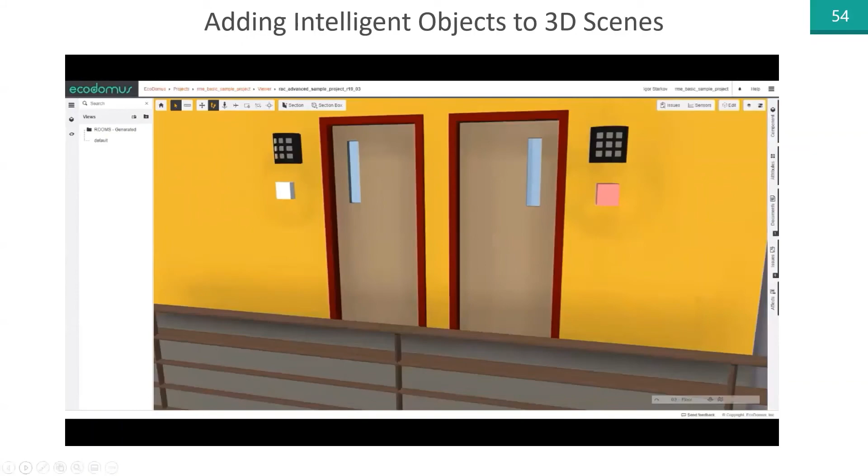So that's pretty much what I wanted to show you in terms of the different types of cases. You've probably seen today maybe 10, 12 different types of how the BIMs can be used, how they can be applied in real life scenarios.

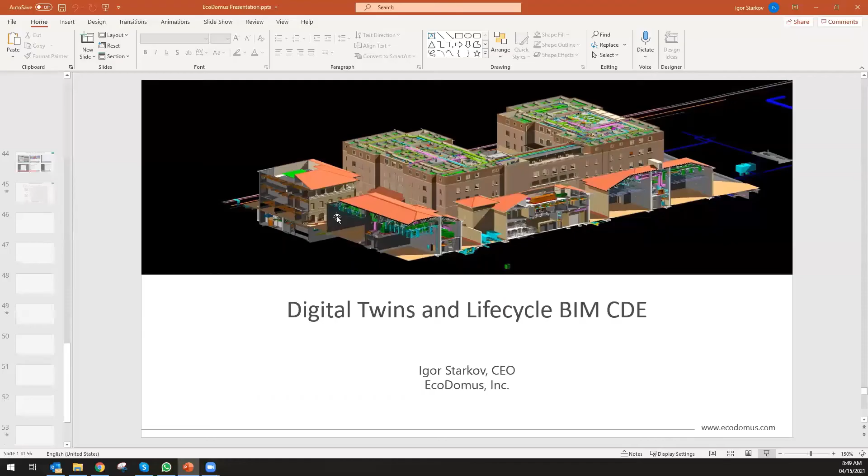This product option is like when you have multiple assets of the same type, you enter the information once, for example, the maintenance instructions, spare parts list, and you just apply it to multiple elements. Not even at project scale, but even if you have, for example, 20 shops.

I got it. Yeah, we used to have it. We threw it away because in real life it didn't work well, because every client was customizing their products. And what we are now doing is we are connecting to systems like CoBuilder, which is managing this product database. It's a separate task, a full-time job to actually maintain those product databases.

And right now we do have a project in Saudi Arabia where CoBuilder is going to be providing us with the product data templates and populate the manufacturer's information dynamically, because manufacturers change their products all the time. The challenge we had with the products table, like you just described, is that it's not static. It's always changing, and it was just painful. It's a separate business line.

So we decided that we would subscribe to a professional products table, like CoBuilder has, and we will just give that task, that headache, to somebody else. So it's a good idea, but it's a separate business to deal with manufacturers. So our focus would be only on the CDE part of it, and let CoBuilder handle the manufacturer's data. All right, good question. Let's see if we have more.

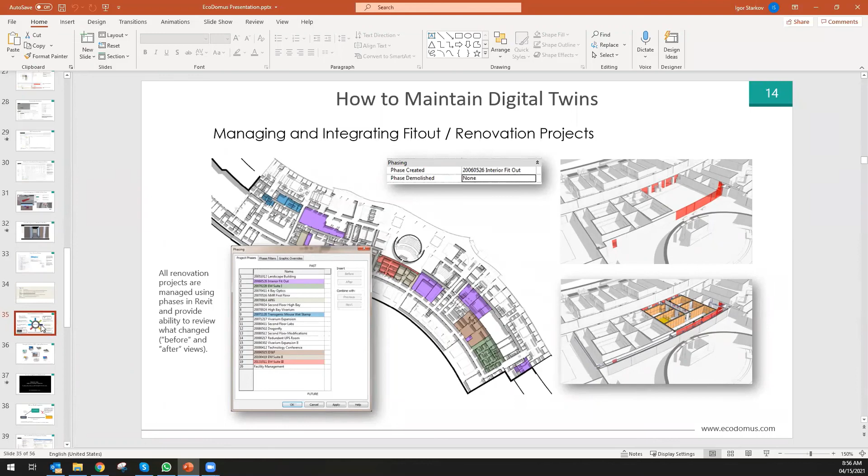What are your main differences with Archibus? Well, if you look at the schema here, we do integrate with Archibus. Archibus is a CAFM application. So they're created to manage the spatial information, move management. They are process-oriented. We are product-oriented.

So for us, the goal is to create this central data information about the actual object. All of the processes are on top of that information. We store information even if it's not needed by anybody, because at some point somebody will say, oh, that's quite useful, I want to use that.

Archibus came from automating the processes. So they said, well, let's manage the spaces, right? And that's how they started developing. There's definitely quite a lot of overlap between all of the products, right? Archibus can also do work orders, and IBM Maximo can do work orders, but people usually, if they want to do work orders, choose Maximo because it does it better. But Archibus does space management better, and somebody else does something else better, right?

So each software application, it doesn't matter really how rich the owner is, even IBM and Apple, they cannot build a universal software that does everything well. You know, some things we do well and other things we do just to keep the client happy, right? So that's why most of the major facility owners choose the best of breed approach. Best of breed means that for each functionality, you choose the product that is best for that specific functionality.

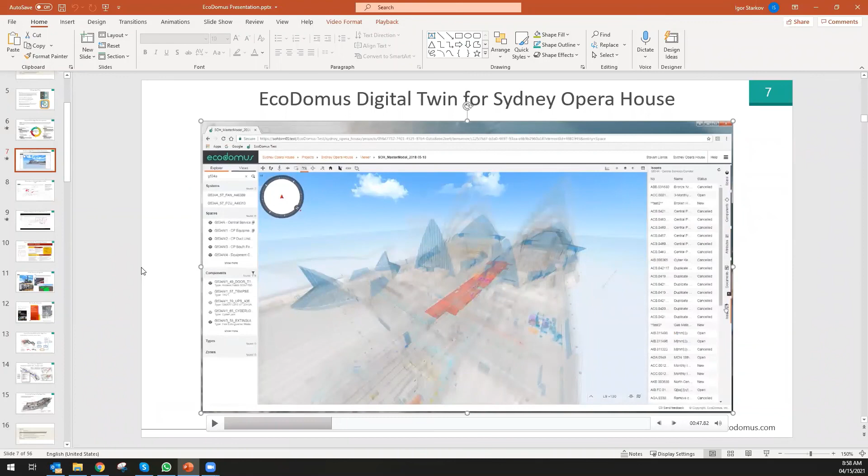So we position ourselves as that product database, a common data environment for the facility, right? Like I mentioned in the first video, I want to be able to answer any question about that location. Even if it's not used for anything, I still want to track this information. Okay, so that's how we position EcoDomus. It's not easy to build that database because you have to consider different sources of data, different ways of how to maintain that information, right?

But in the end, what we see is well adopted is that people say, yes, I want to use Archibus because it's a great product for space management, but I also want to use Siemens Apogee, and in my Archibus and in my Siemens, the same rooms have different numbers. That's a problem because in the model, that room number is also different, and in Maximo, it's also different. Very often we see 3-4 different room numbers for the same object because all of these applications are separate. They are used by different departments.

Your real estate department is using one app, your maintenance department is using another app. They rarely talk to each other because they're paid from different budgets, right? So we often just act as this connecting single source of truth. It doesn't mean that we are not copying information from one source into another. We do. We sometimes even duplicate this information, but we act as the thing that ties it all together. All right, good.

Next, licensing based per user, correct? Yes, per named user, but we sometimes have unlimited pricing options for enterprise clients. Because some clients say, look, I have 10 guys continuously within the property, but we also have external contractors who will want to be a part of our environment, and they access it maybe once a year or once a month. So we negotiate for those purposes unlimited pricing for that specific organization.